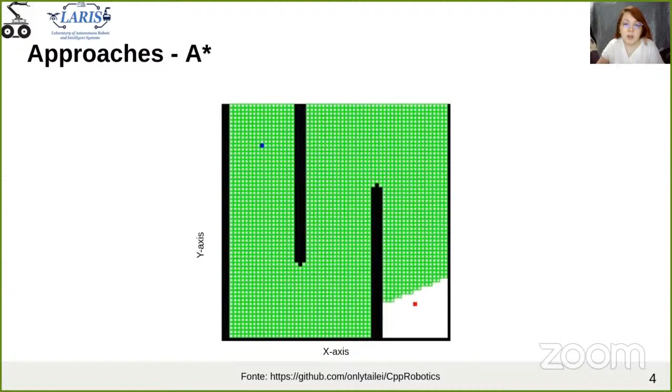The artificial potential field algorithm makes an analogy to electrical fields, creating a map in which the UAV is inserted based on the electrical field. The method considers the UAV as a particle that is influenced by the local field. The map is a potential field formed by the attraction force of the goal node and the repulsion force of the obstacles.

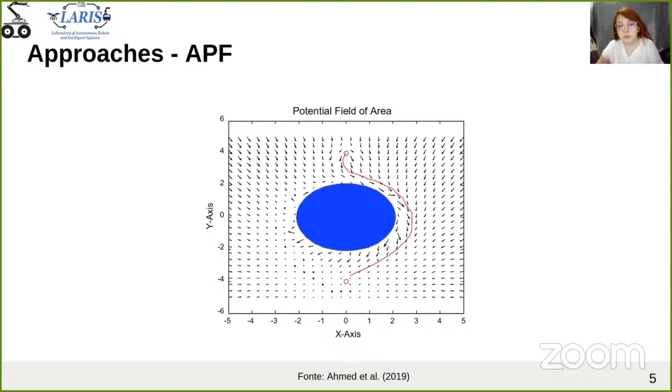The probabilistic roadmap takes random samples from the environment, tests them for whether they are in free space, and connects them. This algorithm consists of two separate phases: the first phase is learning, and the second phase is a query. In the first phase, the UAV creates knowledge about the region to be explored in a probabilistic roadmap of the environment. In the second phase, the map is used to find the shortest path between start and goal node, generating the trajectory.

The RRT algorithm tends to search for solutions in larger environments with obstacles. This algorithm creates a tree from the start node to the goal node, avoiding the obstacles. The main advantages of RRT are: expansion that is heavily biased towards unexplored portions of the environment, distribution of variables in an RRT approach leading to consistent behavior, and RRT always remains connected, even though the number of edges is minimal.

Several techniques were created intended to improve RRT performance. One of them is RRT Connect, that uses two RRTs, one starting at the start node and the other at the goal node. This method divides the computational cost in half, improving the technique.

The simulation uses three environments. The first is a 2D indoor environment with 100 square meters, the second is a forest with 40 square meters, and the last is a 3D indoor environment with 20 square meters and 5 meters of height.

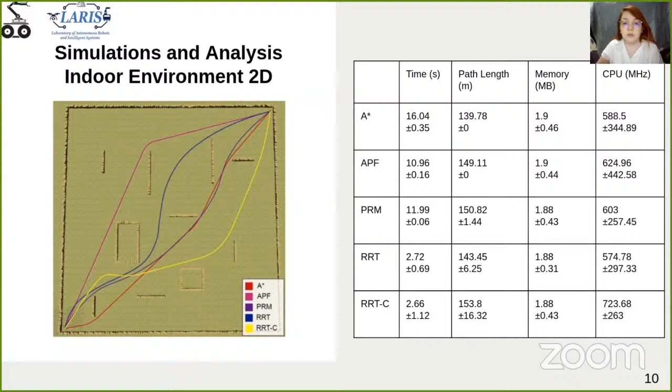The memory and CPU usage of all algorithms are similar. Even so, RRT was the one that used the least CPU.

A-star and PRM made trajectories with the least turns possible to complete the mission, and the other algorithms smoothed their curves, being good paths to be followed by the UAV. RRT made an unnecessary curve at the end of the trajectory. Still, since it's smoothed, it only increased the path length without impairing the UAV's movements.

In this scenario, RRT returned its trajectory in a shorter time, followed by RRT Connect. The shortest trajectory was that of A-star, followed by RRT.

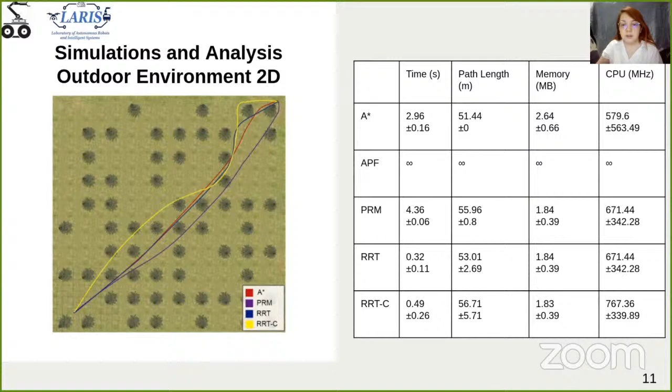The memory and CPU used by each algorithm don't vary much. Nevertheless, it's worth mentioning that A-star used the most significant memory and the lowest CPU usage. The algorithm isn't complex, but it's necessary to save much information to perform it, which is why it's needed to examine all the nodes in that scenario.

In this scenario, A-star presents the best trajectory for having accomplished the least number of curves possible. On the other hand, despite the RRT path always going towards the goal, it made many unnecessary curves. Furthermore, RRT Connect turns to the opposite side of the goal node, only increasing the trajectory. However, all paths are smoothed, and the UAV would have no problem completing them.

In the simulation, the techniques with the shortest times also showed the shortest trajectories. That is, A-star presents the best results, followed by RRT Connect, and finally RRT.

The memory and CPU usage of A-star and RRT are similar, while RRT Connect uses more computational power than A-star and RRT. With that simulation, it's possible to perceive that for 2D environments, RRT and RRT Connect return trajectory faster. However, in a 3D environment, the algorithm has more difficulties finding the route since there are more possible routes and it requires more computational power.

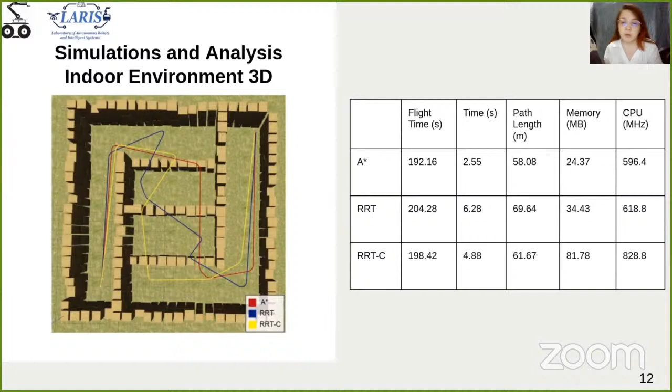As A-star presents the best results among the techniques, a robustness analysis is made between the path planner and the path followed by the UAV in Gazebo using the A-star algorithm. The path plan generates the blue path and the red path that the UAV follows.

Although the difference in the X and Y axis is minimal, the most significant difference was present in the Z axis. In this way, we realized that the UAV can use the trajectory generated by the path planner, because the difference in Z axis was not so significant to cause collisions, and the tiny difference in the X and Y axis shows how good the trajectory is to be used in real UAVs.

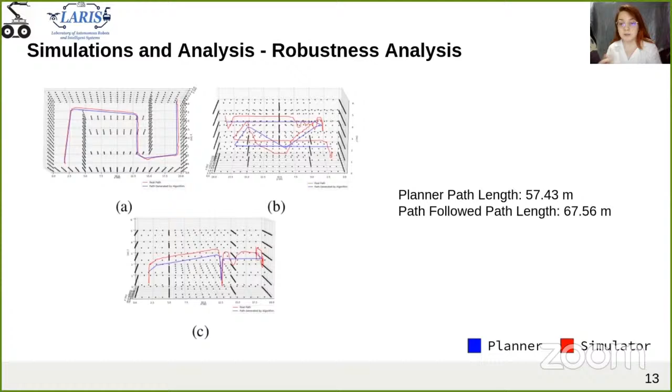The path length suggested by the algorithm is 57.43 meters, and the path followed by the UAV is 67.56 meters. In this paper, we compare a classical approach to understand the advantages and disadvantages in different environments, aiming to help other researchers choose the best algorithm.

Our algorithm shows good trajectories to be followed by the UAV, because they have few curves with well-smoothed paths. However, the techniques A-star, RRT, and RRT Connect present the best results concerning the algorithm's execution time and path length. A-star returns a path with few curves, having good results in missions where it's necessary to increase speed, such as delivery and agriculture.

RRT presented the trajectory with more curves and has good use in dense environments, such as forests. Besides, RRT Connect showed a path that tends to explore more of the environment, having good use in missions such as search and rescue.

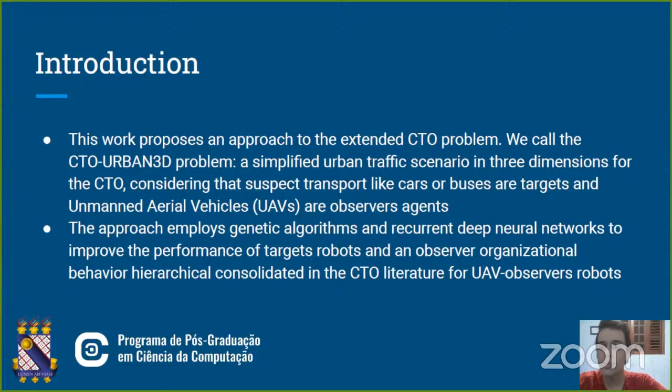To evaluate the proposed approach in agent-based simulation, we will measure the average number of target evasions by subtracting the average number of observed targets from the total of targets. In the neuroevolutionary design process, we employ a simple genetic algorithm oriented in real time by the entry of target genes in the environment. We try to select the hyperparameters for the RNNs that yield the best target gene performance.

As in CMOMMT, the standard environment in the CTO problem is a continuous 2D non-toroidal rectangular field with obstacles containing n observer agents and m target agents, so that n is less than m. However, in CTO Urban 3D, we modified the environment to a continuous 3D toroidal parallelepiped space with obstacles. The velocity of targets is lower than the velocity of observers.

The UAV robots try collectively to move and remain within range of observation to maximize the average number of target robots observed. A note: the next position of each UAV agent is computed by a single UAV observer coordinator agent of the hierarchy that computes and sends the new destination position to each observer agent.

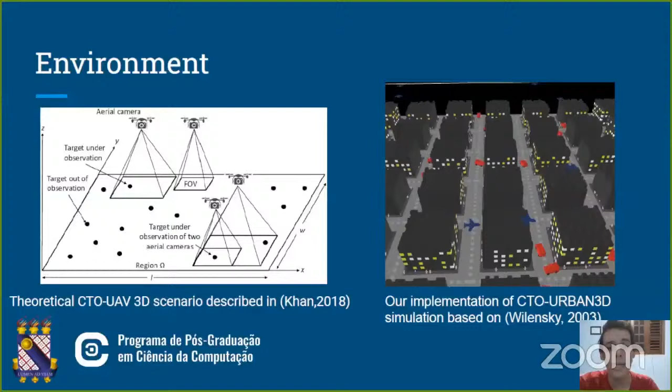Environment. On the left, the theoretical CTO UAV 3D scenario described in Khan, and on the right, the implementation of the CTO Urban 3D simulation based on Wilensky. The CTO Urban 3D evolutionary approach. We have, again, the experiment interface, the ABS, and the training and testing GANN. But now, the simple GA for the automatically designed GANN by the Ent measure.

The CTO Urban 3D evolutionary approach. The node hyperparameters and the global hyperparameters of LSTM group neural networks: learning rate, recurrent dropout, weight initialization, use bias, number of layers, layer type, layer size, layer activation, layer dropout, and optimizer.

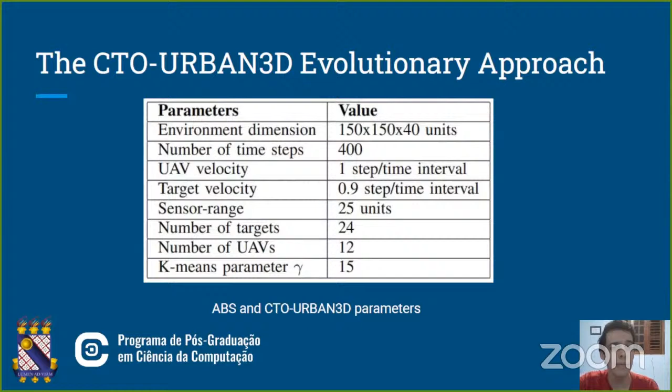And now, the ABS and CTO Urban 3D parameters: the environment dimension, number of time steps, UAV velocity, target velocity, sensor range, number of targets, number of UAVs, K-means parameter gamma, and finally, the parameters in the simple GA: number of generations, population size, retain length, random selection, and mutate chance.

Experiments and results. The NetLogo 3D platform was used for the agent-based simulation, that is, using agent-based simulation to measure the performance of the targets in a 3D virtual environment that can be programmed to represent different complexities of tasks in the CTO Urban 3D scenario. The NetLogo 3D platform was chosen because it allows parallel experiments and easy integration with Python for implementation of the GA, more specifically the open source library Keras for the neural networks.

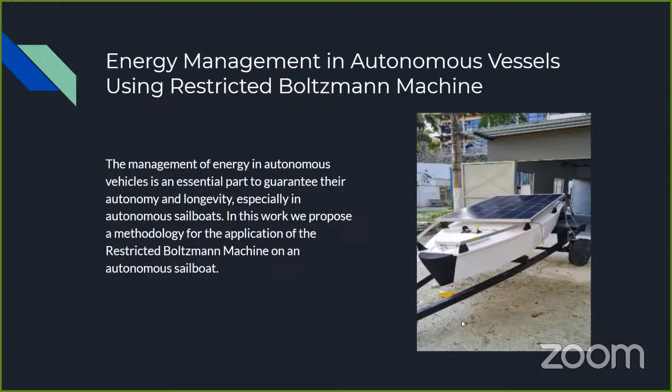Energy management. The management of energy in autonomous vehicles is an essential part to guarantee autonomy and longevity, especially in autonomous sailboats. In this work, we propose a methodology for the application of the restricted Boltzmann machine on an autonomous sailboat. On the right, you can see the N-Boat, a vehicle for the implementation of my code. The purpose of the algorithm is to create an automatic energy distribution system manager of the vessel, seeking to turn electrical components on and off and measuring energy consumption in relation to system recharge, using solar panels.

A good way to understand the project would be: imagine a mission where the vessel will take 1 hour to complete in normal conditions, however at some point along the way we run out of wind and it's necessary to turn on the engine. Estimating that the engines will be on for the rest of the mission, the management will detect that, regarding the incidence of sunlight, we would have energy for more hours, allowing it to complete the mission. Or the opposite happens in the mission, that we started with little wind and in the middle of the journey we start to have strong and more favorable winds. The engine will shut down as the estimated success of the mission period would be sustained.

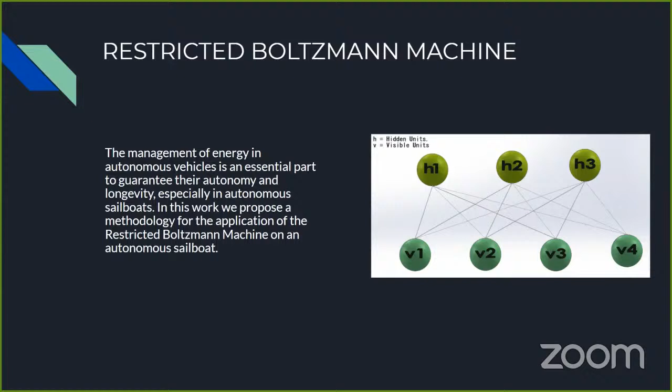I'm sorry, I don't know what has happened, but I think... okay, so now I can see in which slide it is frozen. Can you still hear the video or no? Yeah, we can hear. You can hear, but the slide is the same. Is that correct? Yes. At least in my playback here, it is okay. The slide that's being shown on YouTube is the same that is being played here. So I don't think this was a problem. So let's continue. Okay, Paulo, I'm resuming playing.

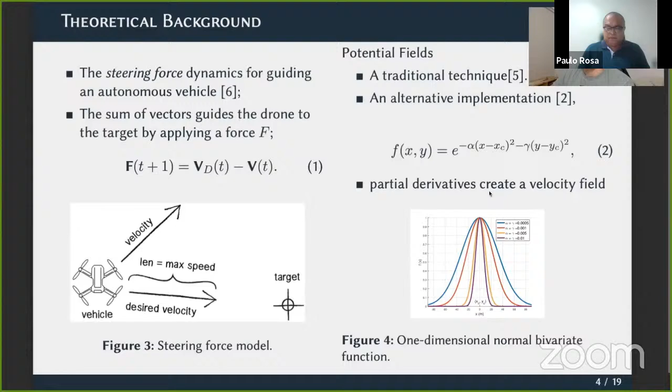We also have used the potential fields technique. It's a very traditional technique, and we used a simple variation using the equation of a normal bivariate function. A velocity field is created by taking the partial derivatives of this function, and then we can apply it as a collision avoidance method for the UAV.

Using UAVs for search applications is not a new concept, but using several UAVs forming a swarm is still a not fully explored concept. Alnon and Cruz studied the usage of heuristic algorithms for search tasks using UAV swarms, and they concluded in their work that the search by line is the simplest and most efficient search method. This is the method that we are going to explore in our paper. Here the agents are going to be distributed by the lines of a discrete map, and they only progress by searching in not visited cells.

We propose a scenario where a UAV swarm is applied in a search mission to find a missing individual. We assume that UAVs do not have previous information about the position of this individual. We also assume that the target is considered found when a UAV is in a range less than 20 meters of this target, considering that the UAVs are capable of identifying the target using a vision system. The last assumption is that the drones can communicate using a common network.

So for this paper, we have developed a simulator to properly evaluate our methods. This simulator was developed in Python using the Pygame library. In this picture, you can see the simulator view. The UAV swarm is searching for the target, and there are obstacles in this scenario that UAVs must not collide with.

The decision-making that we developed in our paper can be divided in two categories: autonomous intelligence regarding a single autonomous UAV model, and collective intelligence, since we are working with a group of drones. There are 6 models in total, 3 for each category. In autonomous intelligence, we have the target search model that is responsible to perform the search and selection of cells in a discrete map. The behavior model uses a state machine to control the autonomous behavior of a UAV. And a collision avoidance model is used to protect and preserve the agent.

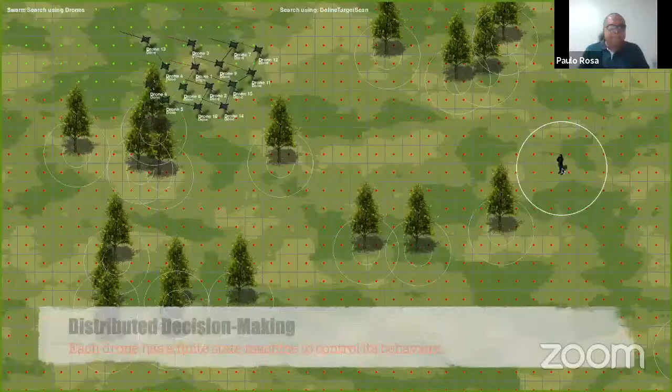Also note that the cells that are being visited are marked. This map is updated at each time step and is shared by all drones.

Here we can see how our blockage prevention heuristics work. The drone identifies that he's blocked, that is, he's not moving by a period of time. Then he will search in the UAV swarm network for the closest drone. He then will head to his coordinates and going to be set free.

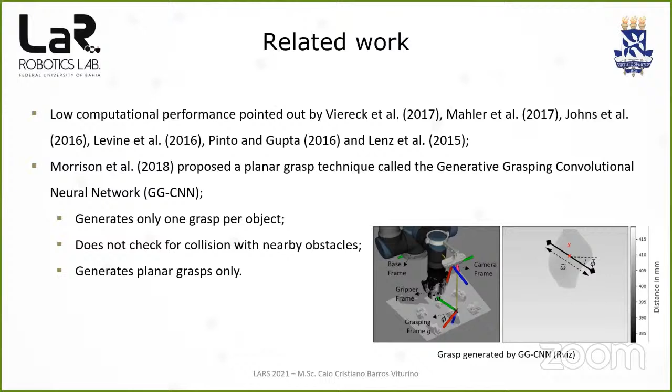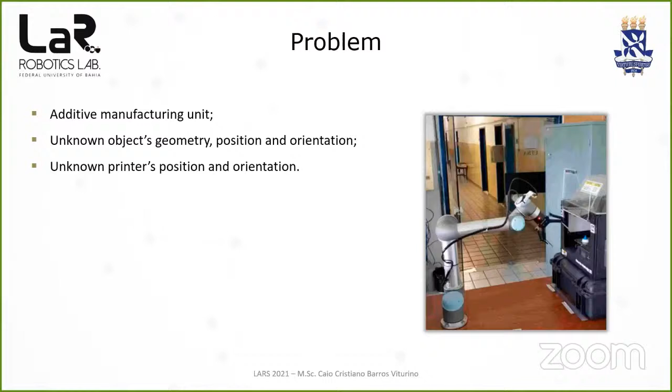We are applying autonomous grasping in an additive manufacturing unit, so the position and orientation of the object are unknown, as well as its geometry. Also, the position and orientation of the printer are completely unknown to the robot. To solve this problem, we propose integrating a convolutional neural network to recognize the object and select the object's point cloud. We are also applying a grasp generator algorithm capable of generating multiple 6D grasps per object.

We also developed a heuristic method to filter the grasps generated by GraspNet. We integrated a collision avoidance technique with orientation control to reach the position and orientation generated by the grasp generator algorithm, in order to avoid collision with nearby objects.

GraspNet is based on variational autoencoders. The authors used PointNet++ to extract features of the object's point cloud and generate new grasps based on the ground truth grasp. In this technique, we construct a latent space that's normal.

For that, we use the Kullback-Leibler divergence to ensure that the latent space is normal. We also apply a reconstruction cost that compares the position and orientation of the generated grasps with the ground truth grasp. In the inference process, we just need to sample from this latent space, and we also need the object's point cloud and the gripper geometry.

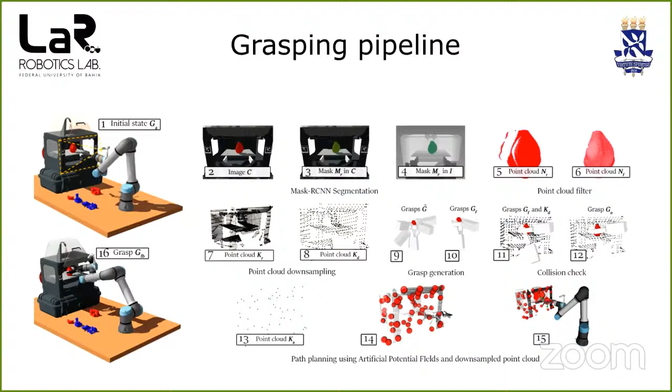Now I will show you a video that demonstrates how this grasping pipeline works.

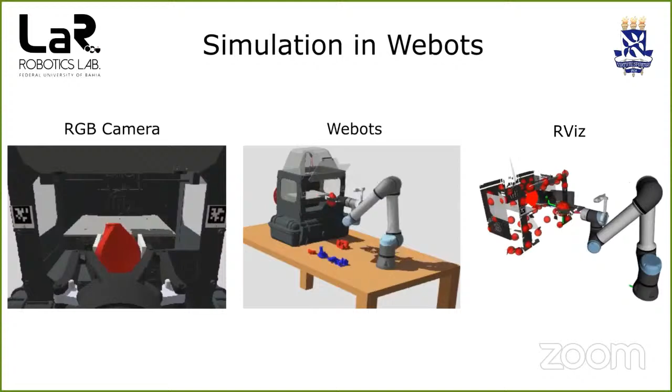Considering the grasps performed, 15% failed due to the path planning algorithm, 11% failed due to a non-successful detection, and 50% failed as a consequence of the grasp generated applied. It was noted through experiments that GraspNet has lower performance with small objects.

Also, the collision check system based on point clouds avoided collisions inside the 3D printer. The AAPF with orientation control avoided collision when the collision check system failed.

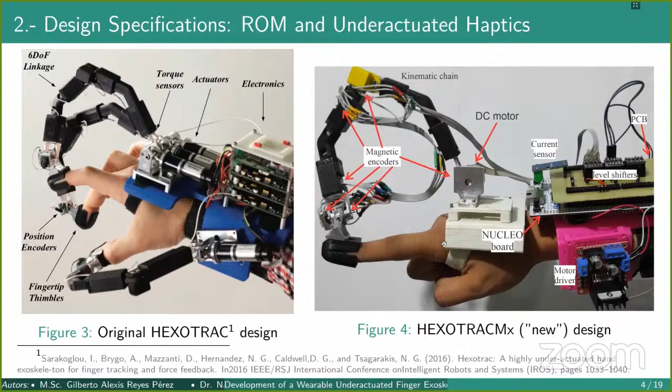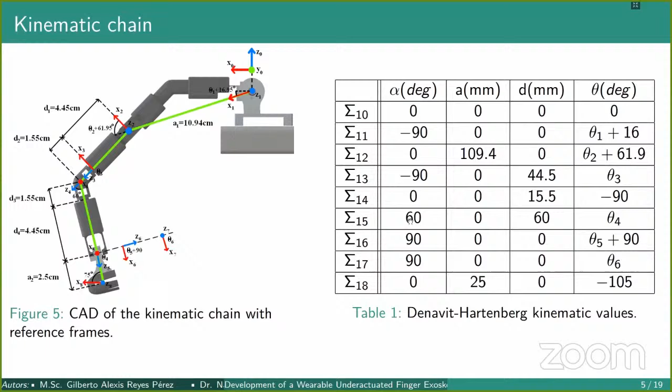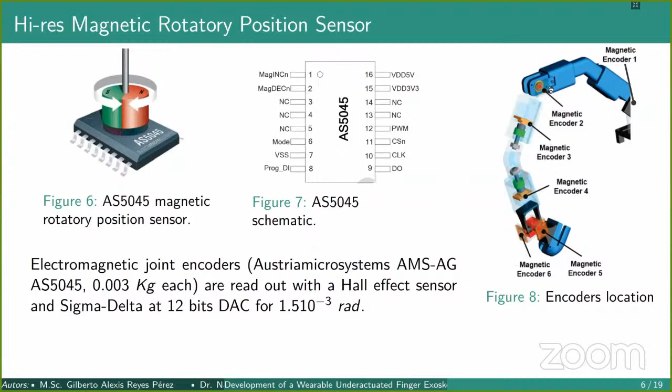At the moment, for the index kinematic chain, we use AS5045 absolute magnetic encoders of high resolution that allow us to obtain the generalized coordinates of the kinematic chain. These encoders can be serially connected, reducing the inputs and outputs of the system. To the right side of this slide, we can observe each position of these magnetic encoders through the kinematic chain.

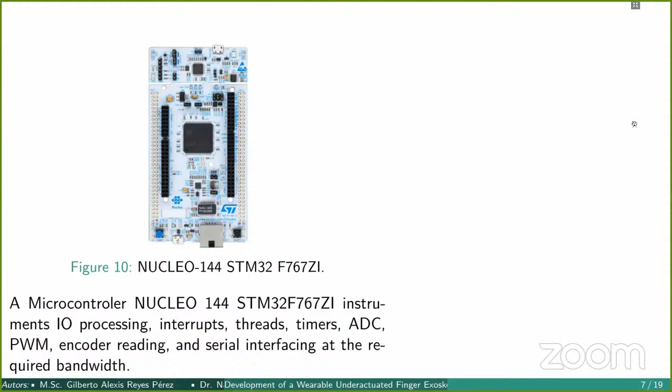For the reading of the encoders, we use an embedded board Nucleo 144 STM32. This board was selected due to its processing and velocity properties, allowing us to reach the low latency required for this kind of haptic systems. Also, with this device, we control the actuator, which is a Faulhaber micromotor of the 1319 series.

This motor comes with a planetary gearbox of 246:1 reduction ratio, which allows us to reach a stall torque of 0.72 Nm, and it has an attached encoder with a resolution of 63 microradians per reading. Also, we use the Nucleo board to control this motor. To control this motor, we use a PI control current loop in torque mode.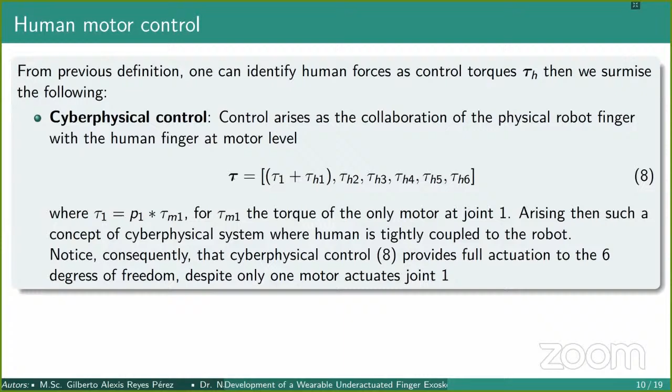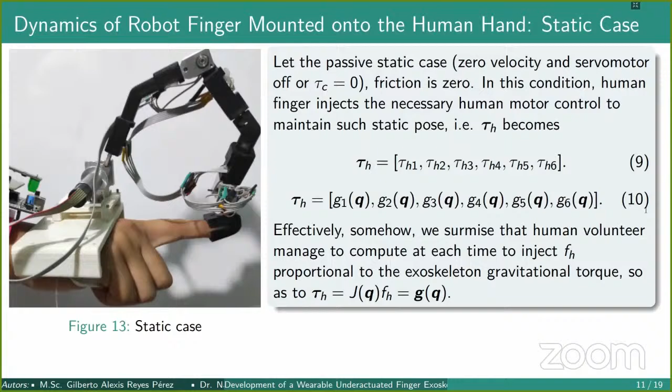To prove that, consider the case where the exoskeleton is worn and in a static pose. Here, the motor torque is 0 and the velocity and friction are 0 too. In this condition, the human user is who provides the force that compensates the gravity force. So we can surmise that the human user actively participates in the control of the device to maintain a static pose. We can see that the only reasonable way to explain this effect is that the human managed to compute at each time to inject the exact force proportional to the exoskeleton gravitational torque, as we can see in the 10th equation.

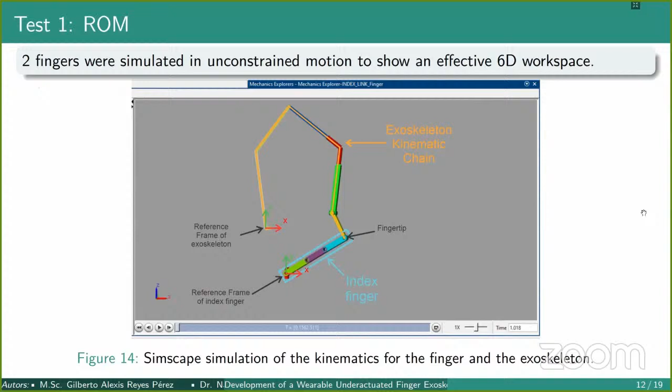At last, to prove its functionality as a haptic device, we present two tests. The first test has the objective to demonstrate that the device is capable of reaching all the range of motion of the finger, despite the size of the finger. For that, we create a kinematic simulation of one human finger attached to the exoskeleton and move the finger in all its range of motion to see if the kinematic chain was capable of following the movement.

So these are the results for these experiments, where the green dots represent the fingertip position in the range of motion for the long finger and the red dots for the short finger. In each position, the exoskeleton was capable to follow up the finger movement without causing any constriction. That includes the extreme cases of total flexion and total extension. From this, we can summarize that the exoskeleton provides a full range of motion for the finger without causing any constriction for the user.

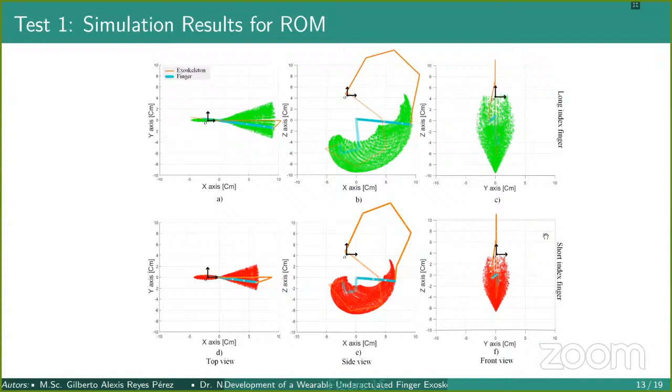And for the second test, we have the objective to validate the exoskeleton as a haptic device. So we develop a virtual environment in Unity 3D where we put two objects with different stiffness. The red object comes with a spring value of 100 and the green object comes with a spring value of 50. To the left of this slide, we can see the configuration of the experiment that simply consists of touching both virtual objects with the device to see what kind of haptic sensation provides.

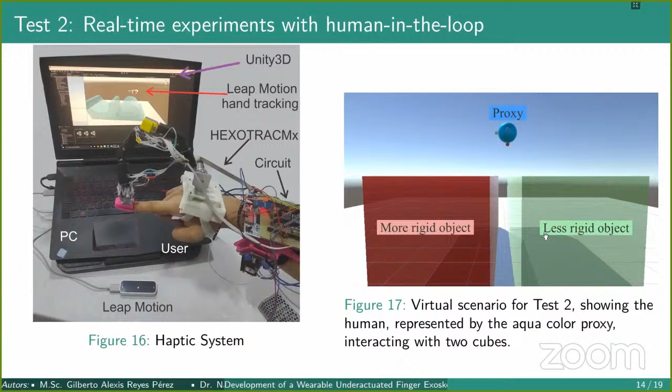At last, we like to discuss that the development of a hand exoskeleton stands for a challenging issue due to its high complexity and requirements. The human in the loop must be considered in the analysis of the system because its active participation is not negligible. So, in this way, the system can be considered as a cyber-physical system. Finally, the device presented here is an index finger wearable exoskeleton with open architecture that allows full range of motion of the user finger and it's validated as a haptic interface. And that was demonstrated with the results of the two tests shown. Also, the 6-dimensional operational force exerted by the human at the end effector is propagated as human control torques complementary to the torque generated by the motor at joint 1.

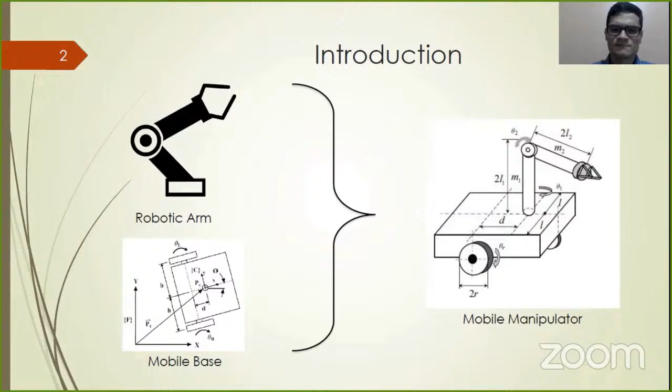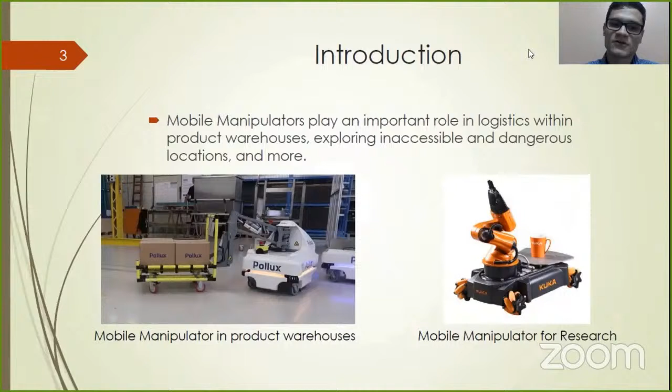Good evening, everyone. My name is Luis Raja, and the theme of this presentation is Constrained Control of Non-Holonomic Mobile Manipulator by Explicit Reference Governor. Mobile manipulators are a class of industrial robots, and it's basically the union of a robotic arm on a mobile base. Mobile manipulators play an important role in logistics, within product warehouses, exploring inaccessible and dangerous locations, and more. However, it's not an easy task to control or navigate them. They have singularities and non-linearities. Moreover, while moving, they need to avoid obstacles and restricted areas.

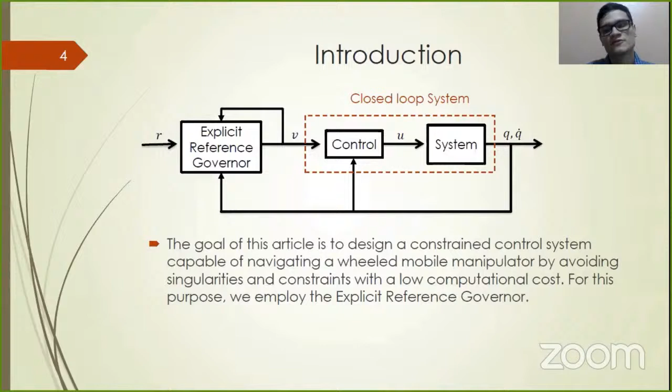So the goal of this article is to design a constrained control system capable of navigating a wheeled mobile manipulator by avoiding singularities and constraints with a low computational cost. For this purpose, we employ the explicit reference governor. The explicit reference governor is one recent alternative solution to constrained control problems that provides a suboptimal but analytic solution. Its basic idea is to dynamically change the reference signal of a pre-stabilized feedback control system to deal with constraints. So it basically changes the reference input to give a modified reference for the closed loop system, given by the states of the system and the modified reference.

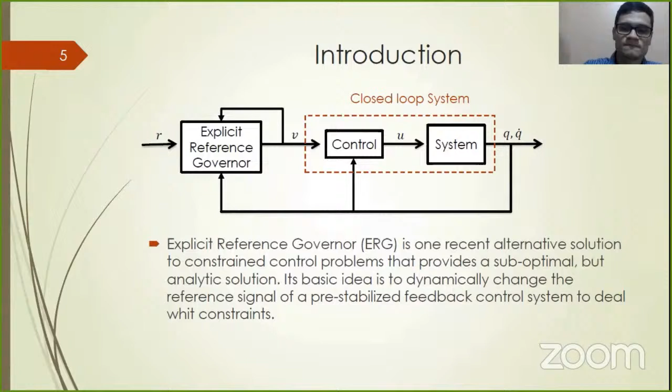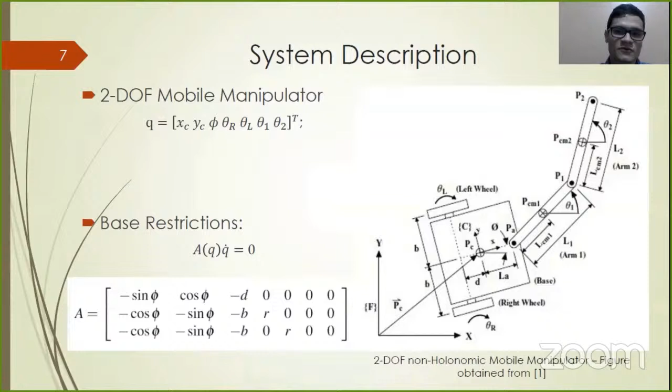The dynamic modeling of the mobile manipulator is given by the Euler-Lagrange equation, but it's not proper because the lambda term is not trivial. So we have to modify the Euler-Lagrange equation to a new one based on the null space of matrix A, which is S transpose, by multiplying it and changing the vector Q to Z dot. We have the new closed loop system in restricted space, and it's given by this figure.

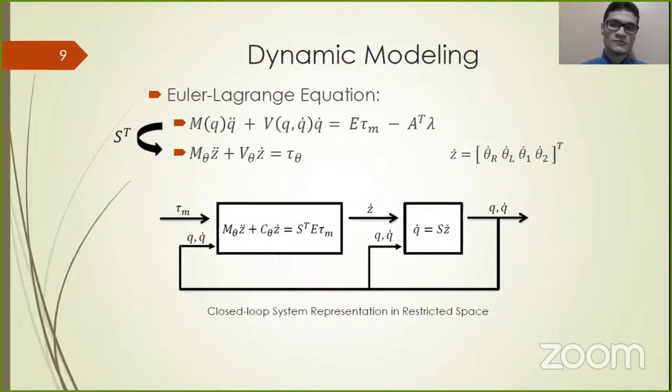The final step of the dynamic modeling is to modify the closed loop system representation from the restricted space to the workspace. To do that, we must find a Jacobian which maps the mobile manipulator to its end effector. After finding it, we multiply the latest equation by the Jacobian transpose and change the variable Z dot to X dot, related to the velocities of the end effector x and y position and the mobile base x and y position, respectively.

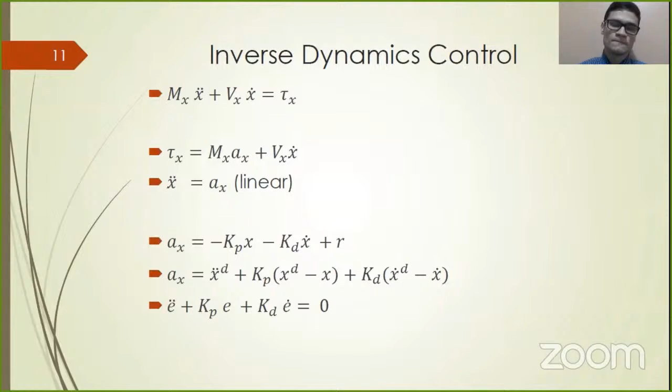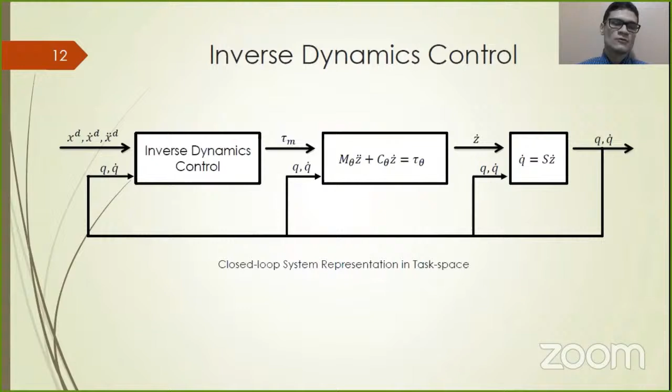The inverse dynamics control is pretty straightforward. We just need to find a nonlinear input for the system to give a linear output, which is the AX. And to control it, we use the KP and KD gains related to the position and the velocity of the system, and the reference input, which will give us the desired position, velocity, and acceleration of the mobile manipulator. And it will give us the error formulation. And this is the closed loop system representation in task space with inverse dynamics control.

The explicit reference governor is essentially a reference modifier. It stays between the reference input and the stabilized system. And the goal of the explicit reference governor is to create a new reference which will avoid the constraints that you give to it. And there are two essential parts: the dynamic safety margin and the attraction field.

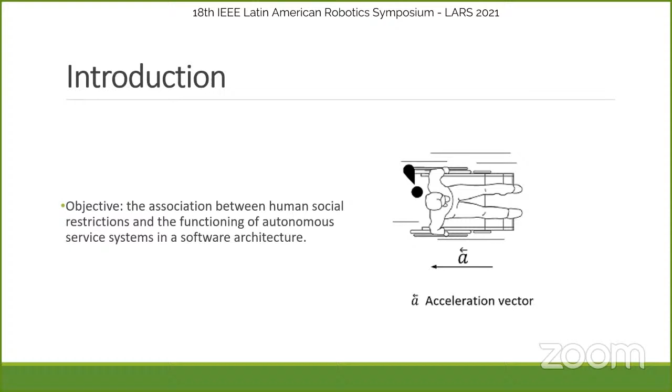For an autonomous system to fulfill all its goals, it requires a core set of algorithms and technologies that can be categorized into perception, planning, decision-making, and a human-machine interface. Thus, autonomous systems use several sensors to measure data from external environments, which are manipulated by perception algorithms to summarize the data into useful information that are used by planning and decision-making algorithms to then produce commands to be followed by the actuators. To perform the organization and determine how these algorithms work, a software architecture needs to be implemented.

So, the architecture proposed by this paper was organized in layers that contain groups of components in common. This distribution is made by 6 layers: sensors, perception, database, planning and decision-making, system management, and control.

Separating the architecture into layers increases the flexibility and the scalability of the architecture, as this method of organization allows the replacement of one or more components of the layer without compromising the operation of the system, as long as the communication interface with other layers is maintained, of course.

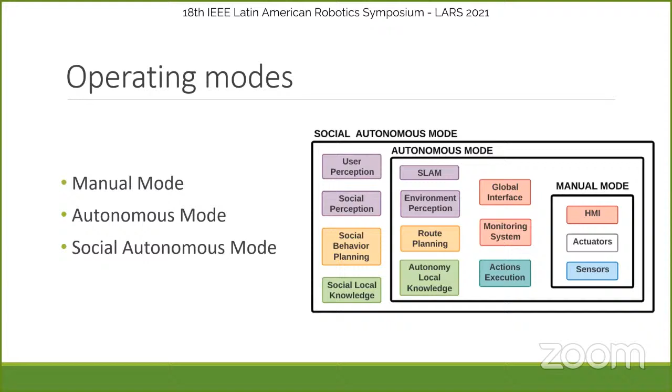As future work, the proposed architecture is being implemented through the Robot Operating System, and with this, it will be possible to analyze the behavior of the system empirically and make, if necessary, modifications to its structure. Thank you for the attention, and if you have any questions, you can contact me by email.

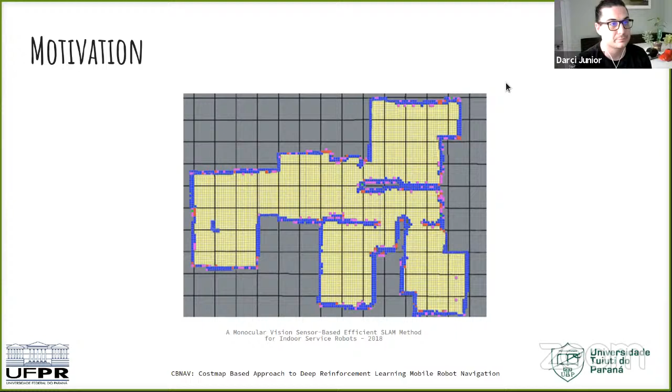In nature, some animals and bugs have a different approach to navigate in the environment. For example, sniffing in lobsters, whisking in rats, and antennae in cockroaches are examples of sensors used to navigate.

The information is used both for sensor measurement, to adapt the body so as not to touch the wall, for example, and to propagate the information through neural feedback control to move straight ahead, for example, to transition from state X1 to state X2 without touching the wall.

Complementary to the free collision techniques, and I'm just saying free collision techniques is my name that I put in the concept. Okay, ants use pheromone-based navigation to create a safety path from starting to target position. It's a classic concept applied to ants. Now, if you cross the line, the ants cannot move. In summary, bugs do not know the environment maps, but know how to navigate through the environment without collision. Once they know the path, they can walk through the path, but a priori, they don't know the map.

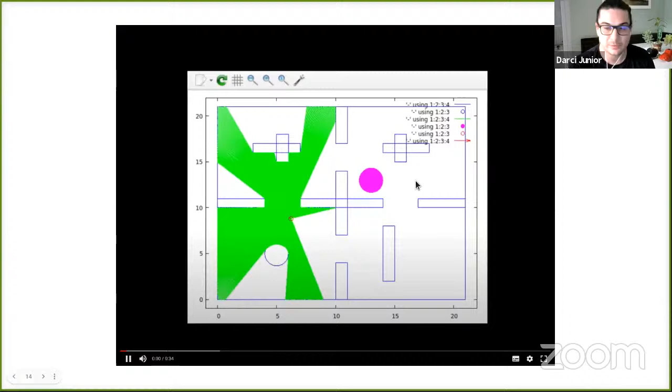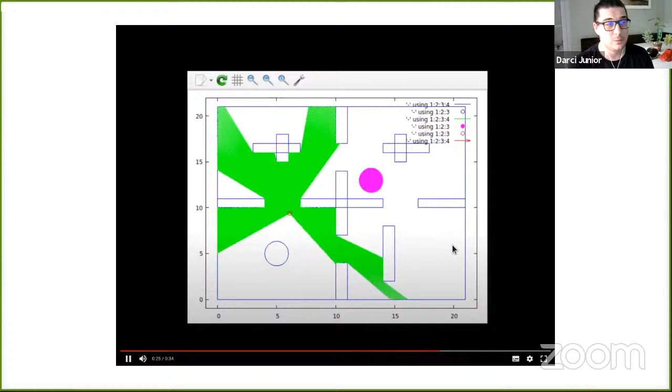Here I have a very short video. It's our agent working in environment number 1. And here we are using our best model to describe the behavior. As you can see, we sometimes have very hard conditions. In this case, our agent does not have a map. They just know where they are and where they should be. For example, here, they turn around and decide to go there.

Okay. Oops, I'm sorry.

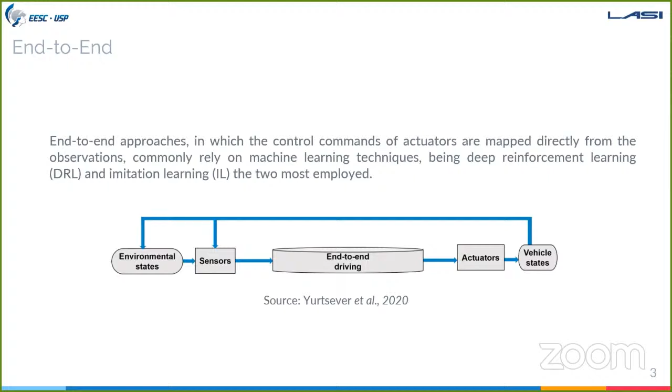To solve this problem of ambiguity at intersections, Codevilla proposed the method conditional imitation learning, in which separate modules learn specific tasks that are activated one at a time when necessary. Following this idea, other works were done, such as the ones of Miller, Vergara, and Osinski. Other important and recent works, related more specifically to deep reinforcement learning, use data augmentation to increase performance during training.

So, in this work, we aim to design a method combining conditional learning and reinforcement learning to solve the problem of lane keeping and intersections in the autonomous driving domain. Moreover, we want to control both lateral and longitudinal vehicle movements, with no need of expert demonstration, and using data augmentation to improve sample efficiency and generalization.

In our problem, the vehicle should navigate from an arbitrary start position to an arbitrary destination autonomously, in a simulated urban scenario composed of T intersections on the CARLA simulator. The agent is expected to drive at speeds near 20 km per hour, stay lane-centered, and turn or go straight at intersections when it's needed.

It's important to note that our focus in this work is only on how the agent deals with lane keeping and intersections. So crosswalks, traffic lights, gear shifting, other vehicles, and pedestrians will not be considered. To accomplish our objectives, we design our system as follows.

The vehicle is equipped with a monocular camera that provides RGB segmented images. We decide to stack the last 4 frames to also get temporal information. Then, images are augmented and fed into an encoder. Besides the visual information, the vehicle also measures its speed, throttle, steering, and the angle between its heading and the direction of the path. Then, the processed images and measurements are concatenated, resulting in a latent state vector.

At this point, we have the conditional part of our architecture. The route planner generates the waypoints that the car should follow and also provides a high-level command that represents the driver's intention, similar to GPS navigation assistance systems. So, according to this command, the latent state vector will be passed to one of the 3 PPO trainers. These PPO submodules are trained individually so that they can produce specific policies to perform 3 different maneuvers: follow lane, turn right, and turn left.

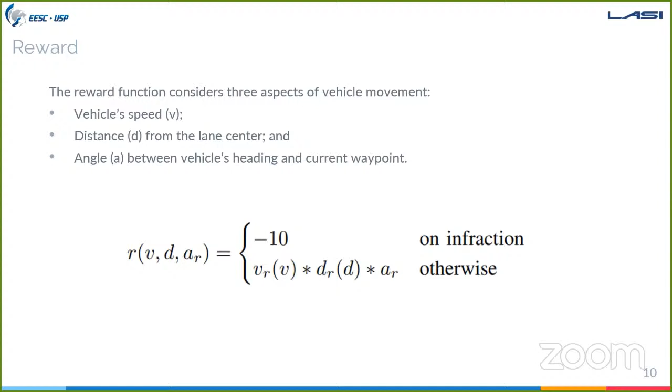Regarding the term related to distance from lane center, the lesser the deviation, the greater the reward. Similar to distance, the angle term results in greater rewards when the angle difference is small. Finally, the speed term reaches its maximum when the vehicle drives at speeds between the low limit and the target speed. The reward will be lesser if speed is lower than the minimum or greater than the target speed.

Our simulations are divided into 4 stages, 3 stages of training and 1 for test. In the first stage, the vehicle is set to drive around the map as indicated by the green line in the figure. Then, in the second stage, the vehicle is set to drive a more complex lap, encountering some intersections on the way. In the last training stage, the vehicle should drive random routes. All training stages are in Town 2 of CARLA.

During test, vehicles should drive random routes as well, but in Town 1, similar to Town 2 regarding its structure, but with different surroundings. Some training constants that we define for the reward function are: minimum and maximum speed are 15 and 25 kilometers per hour. Target speed is 20 kilometers per hour. Maximum distance that the car can deviate from lane center without ending an episode is 3 meters, and maximum angle of 180 degrees. Moreover, these are the specifications of the machine that we used.

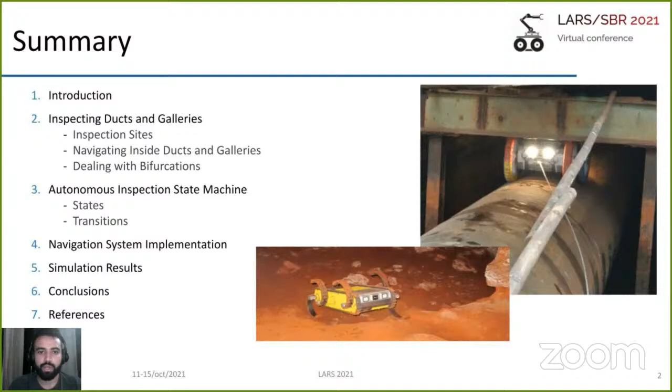Hi, my name is Guilherme, and I am a systems engineering student at Federal University of Minas Gerais. Today, I'm going to present the paper entitled Towards a Simple Navigation Strategy for Autonomous Inspection of Ducts and Galleries. First of all, we will be presenting an introduction to the problem, followed by the ducts and galleries inspection topic. Next, we describe the state machine developed for autonomous inspection, and then the systems used to implement everything. We will also present all the results obtained in simulation, and finally, the conclusions and references.

The main motivation behind this work is the possibility of mitigating dangers to human operators responsible for inspecting confined environments. Among various existing risks, we can mention no ventilation, toxic gases, floods and collapse risk, venomous and poisonous animals and insects. Therefore, a feasible solution for this problem is using an autonomous robotic platform to perform these inspections, such as EspeleoRobô. This robot was developed in a partnership between UFMG and ITV. It was designed to move on rough terrain and confined environments.

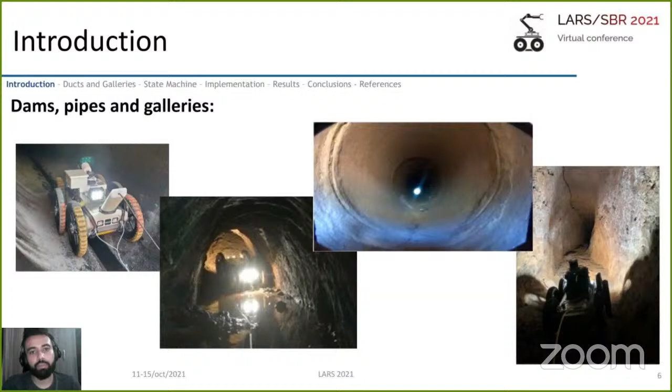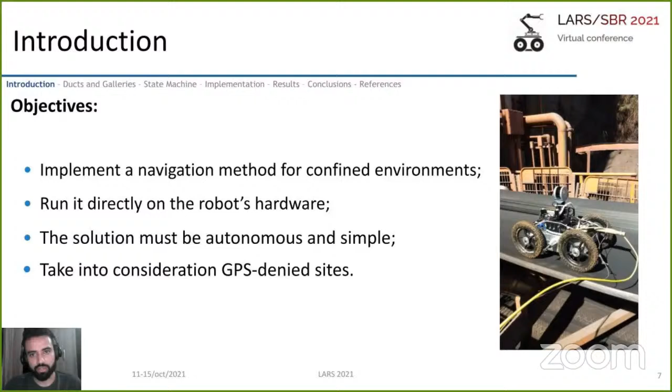Initially, the idea was to teleoperate the robot during inspections in natural caves. However, it was also possible to inspect dams, pipes, galleries, among other confined spaces due to its great mobility capacity. Considering that inspections in confined environments are hard tasks, a great strategy is to implement autonomous solutions running directly on the robot hardware, without human control. The method described here is based on maze-solving algorithms and data from basic sensors, such as an IMU and a planar LiDAR. So, the main purpose here is to describe a robust, fast, and practical solution to perform inspections safely.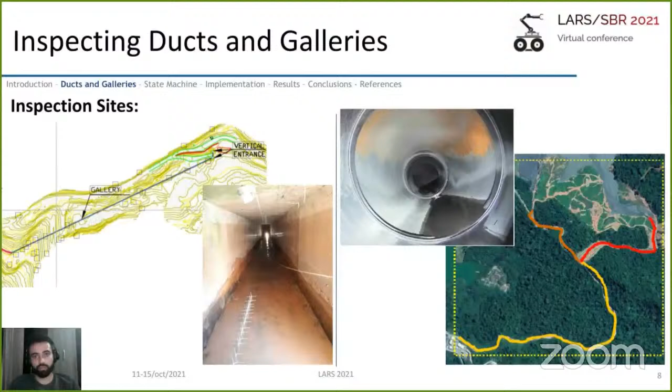Ducts and gallery systems are very common in the mineral industry. Normally, they are extensive corridors close to tailing dams, plants, and other industrial structures, and they are often used to transport different types of byproducts. Curves and bifurcations might make the transport of mine tailings harder, so they are mostly long and straight, as can be seen in these real-life examples. To navigate in these sites, the idea is to assume the robot is always moving with a fixed forward velocity and a variable angular velocity, to try and keep the robot on the center line of the site it is inspecting, reduce the risk of collision or rollover.

The method to control the angular velocity uses a planar LiDAR and divides its data in two sides, left and right, as can be seen in red and in blue, and then it seeks for the closest point on each side. Each point is considered as a reference for each side of the gallery or duct. The purpose is to keep the distance between the robot and each wall the same, keep it in the middle. So the distance difference is considered the position error with respect to the central position. If it equals 0, the robot is in the correct position, else a proportional angular velocity is computed, directing the robot to the center.

To navigate inside ducts, the inclination is also very important. Thanks to the circular format and lack of references, the LiDAR might perceive the robot as being on the center line, but it fails to detect a crescent inclination that may lead the robot to roll over. To prevent that, we use orientation data provided by an IMU. If any lateral inclination is detected, a proportional angular velocity is computed until that inclination is 0 again. The distance and orientation errors are normalized and then added. A PID controller computes an angular velocity dependent on the errors.

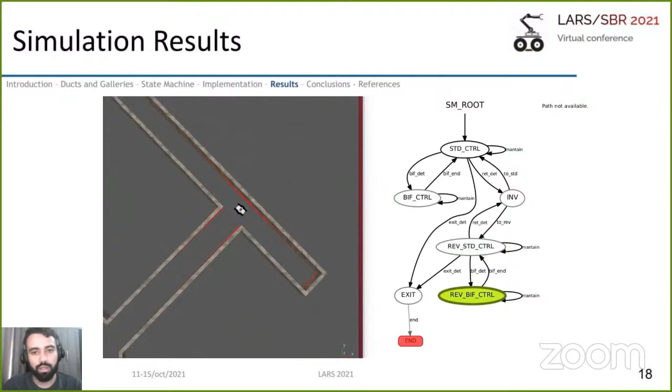The second scenario has 213 meters in length and is based on the real-life tailing dam duct as shown previously, and is composed of 3 main segments and 1 bifurcation.

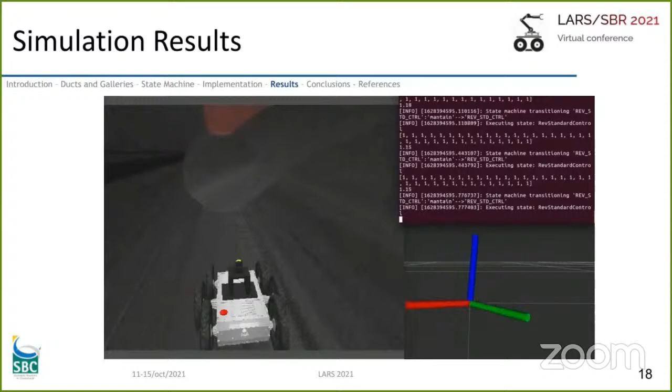So, we were able to implement and simulate a simple autonomous navigation method for ducts and galleries with tree-like structures. We used 2 control algorithms, one for following the center line of the way, and another for following the left wall in bifurcations. The transitions between these 2 operating states were performed from the analysis of the planar laser measurements.

The next steps are: run the proposed method on the real EspeleoRobô and investigate more robust maze-solving algorithms that do not rely on precise localization or mapping, including algorithms capable of handling internal loops or more complex structures.

Can you see my screen? Yes. Just some images about ducts and galleries inspection sites. Above we can see the galleries systems, and below we can see the ducts systems.

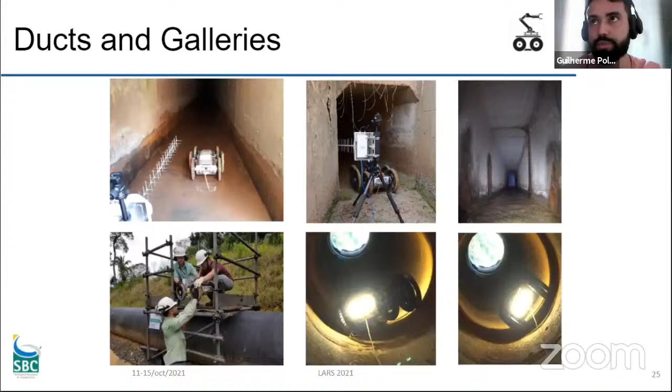And the last image, we can justify the use of the IMU to prevent rollovers of the robot. And another image, this is a simulation overview of the results shown in the presentation, a reconstructed map of the reconstructed in CoppeliaSim.

And here we can see the inspection start point, the robot entering the duct system. He navigates following the center line of the duct. He deals with bifurcations following the left wall and comes back in dead ends.

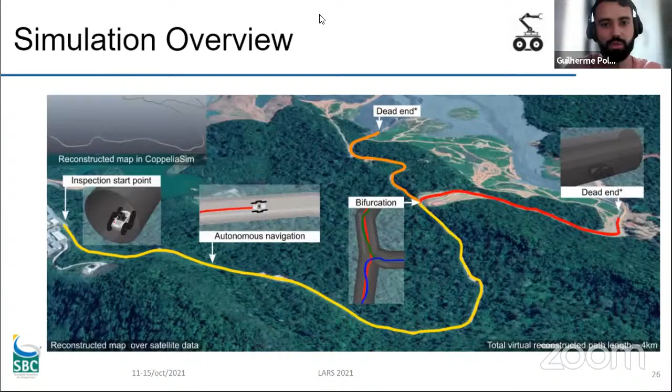Hi, Fernando, I have a question. Yes, please. Guilherme, thank you very much for your presentation. Very nice work.

I have a simple question. Something that is not clear to me is how do you prevent your robot from entering a loop? I mean, it goes until the end of the gallery, then it goes back, finds a bifurcation it already visited, and takes the other direction. When it comes back, how do you prevent it from taking a direction it already took before?

Yes, our algorithm works for tree-like structures. Following always the left, we can inspect all the tree-like structures. If there are internal loops or more complex structures, this method will not work to inspect the whole system.

Thank you, Guilherme. I look forward to seeing this algorithm implemented on a real robot. Thank you. Thank you, Bruno.